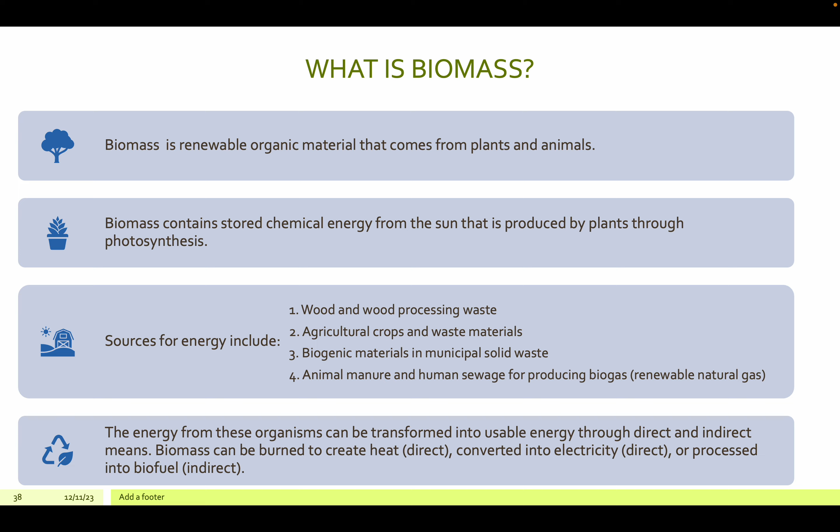So for biomass energy definition - biomass serves as the primary raw material for the production of biomass energy, or in short, bioenergy. Biomass energy refers to the energy produced from organic matter, such as plants, agricultural crops, wood, etc. Bioenergy is a renewable energy source that can be converted into heat, electricity, and biofuels.

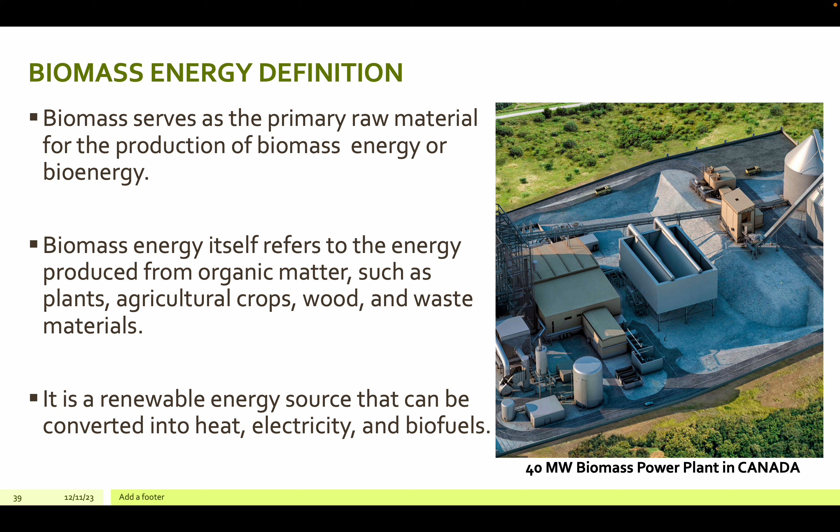On the right side is an example of a biomass power plant located in Canada. Its capacity is 40 megawatts.

History of biomass energy: in 1840, there was the first commercially used biomass gasifier, built in France. In 1880, Henry Ford used ethanol to fuel one of his first automobiles, which was called the quadricycle.

In 1910, coal began to replace the use of wood in city homes. In 1950, electricity and natural gas displaced wood, used in most homes.

And in 1990, in the United States, the Clean Air Act controlled the sale of oxygenated fuels in areas with higher levels of carbon monoxide.

In 2014, industries increased biomass as a source of energy while following environmental laws in order to protect the atmosphere. As you can see, technology has made biopower more efficient over time because there are now machines capable of producing biomass into pellets that can be used as fuel.

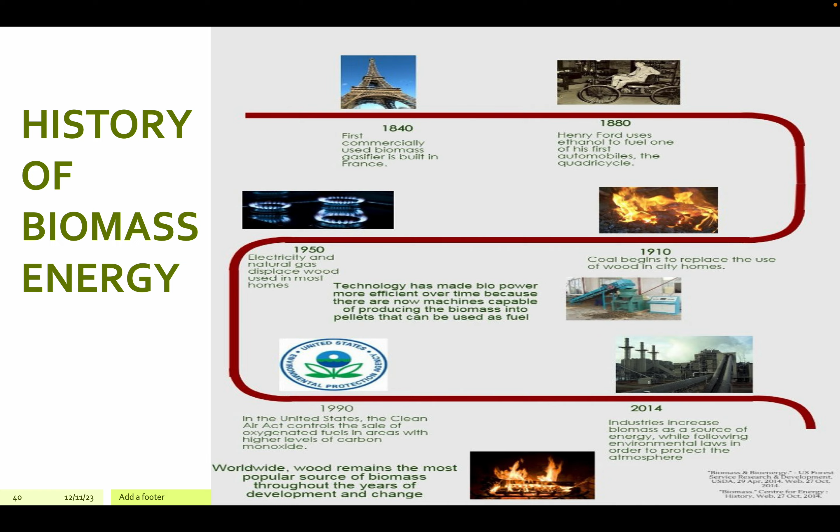So where does biomass come from? It can be obtained from plant, human, or animal-derived organic matter.

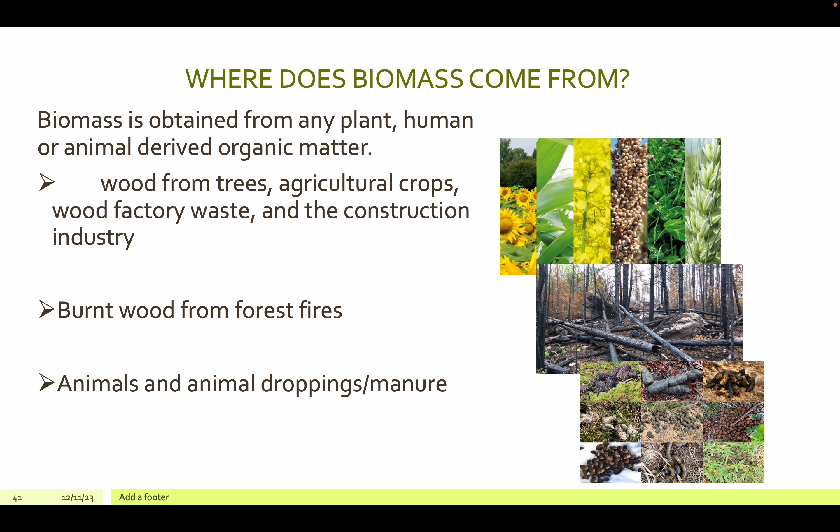How do we use biomass to generate electricity? There are many ways to generate electricity using biomass. One of them is combustion - a method of burning biomass to generate electricity. This is the most common method used.

Second is conversion to a gas or liquid fuel. Biomass can be converted to a gaseous or liquid fuel through gasification or pyrolysis method. Gasification is a process that exposes solid biomass material to high temperatures with very little oxygen.

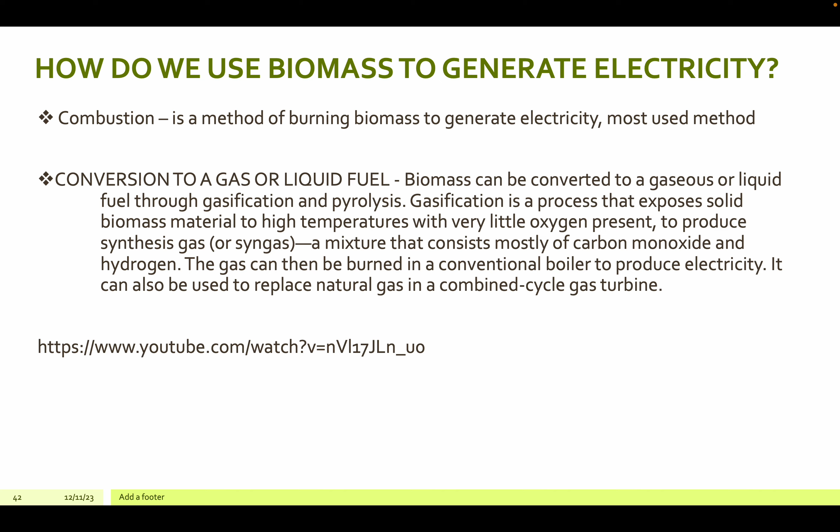The byproduct of this is synthesis gas or syngas. This is a mixture that consists mostly of carbon monoxide and hydrogen. This gas can be used and burned in a conventional boiler to produce electricity, or it can be used to replace natural gas in a combined cycle gas turbine.

Through thermochemical conversion process, we can generate electricity. As mentioned earlier, we can generate electricity using biomass through processes such as pyrolysis, gasification, and combustion. As you can see, biomass has many uses.

Using the pyrolysis method or process, we can produce charcoal, liquid oil, and fuel gas. These have different uses and byproducts.

The charcoal can be used for barbecue, and also used in the metallurgical industry. Its byproduct, liquid oil, can be used in our cars and engines, and in return can generate electricity. It can also produce fuel gas, which can also be used in engines to produce electricity.

In the gasification process, it can produce fuel gas which will be used in engines and can also produce electricity, and gas turbines which will generate electricity as well. And then our third process, which is combustion or direct burning, can also generate electricity through direct burning.

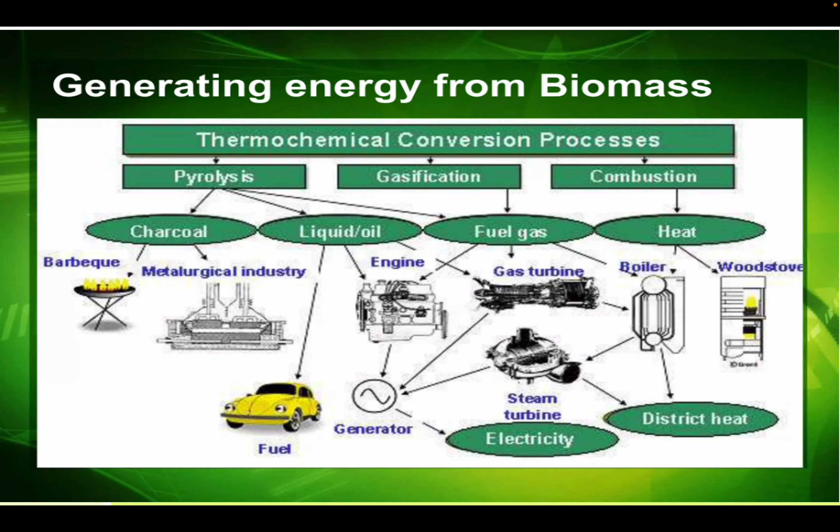Through the boiler, it will generate electricity. So, pyrolysis - these three processes will be elaborated further in our next slides.

So, pyrolysis. Using pyrolysis, waste to energy technology applications for municipal waste treatment in the urban environment is used. The pyrolysis process begins when municipal solid waste undergoes pre-sorting and shredding.

So, our municipal waste undergoes pre-processing as we can see in our flow chart. The dry biomass materials are sorted from the recyclable materials and inorganic materials. What we use for pyrolysis are the organic materials, so the non-organic materials are sorted out or separated.

And then, it is metered into a reactor. After the non-organic materials are sorted or separated, the organic materials will be metered into the reactor with little or no oxygen. The temperature in the reactor is increased to a range between 1,200 and 2,200 degrees Fahrenheit. So, as you can see, after sorting and shredding, it does go directly into our pyrolysis reactor, which reaches 1,200 to 2,200 degrees Fahrenheit.

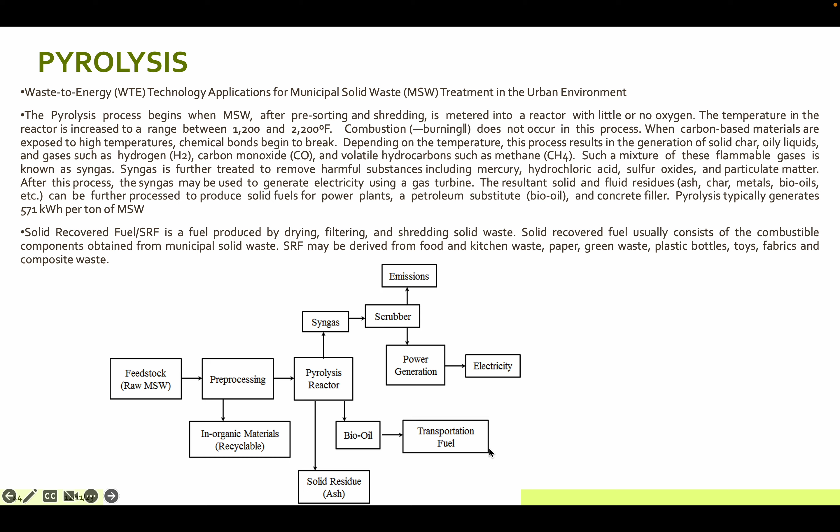This bio-oil is used as our transportation fuel. So, the next process is gasification.

Similar to pyrolysis, conventional gasification often begins after removing recyclables and large items. Just like with pyrolysis, recyclables are segregated since we still use the organic matter.

So, the remaining municipal solid waste is fed into the gasifier. After it is segregated, those materials are dried, then they go into our gasifier. The gasification reactor is heated to a temperature between 1,450 to 3,000 degrees Fahrenheit.

Gasification uses a sub-stoichiometric volume of oxygen, often called a starved air process. This creates a smoldering reaction which generates syngas, a byproduct mixed with combustion products such as carbon dioxide and water vapor.

Often, steam is added into the process in order to enhance production of hydrogen and hydrocarbon gases. The syngas byproduct is cleaned up to remove hazardous components and can then be used to generate electricity.

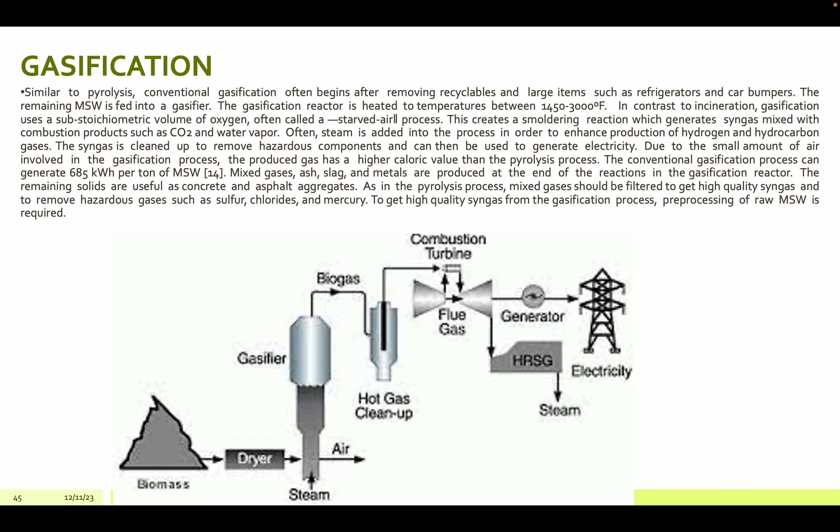The remaining solids are useful as concrete and asphalt aggregates. As in the pyrolysis process, mixed gases should be filtered to get high-quality syngas and to remove hazardous gases such as sulfur, chlorides, and mercury. To get high-quality syngas from the gasification process, pre-processing of raw municipal solid waste is required.

The steam creates pressure in the boiler, and the force of the steam rotates the turbine. The turbine then moves a wire coil in the generator, and the generator converts mechanical energy into electrical energy.

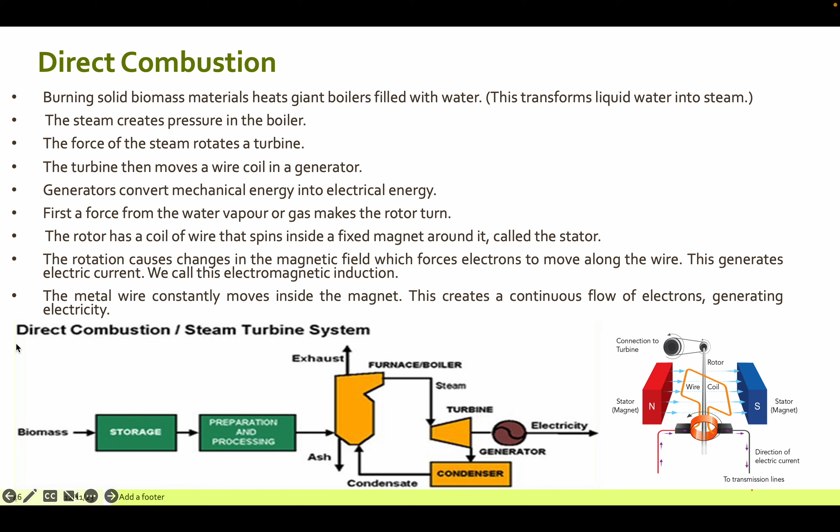This is the direct combustion or steam turbine system, along with its illustration. Next, aside from those three, another method is the thermochemical conversion.

Aside from that, we can also generate electricity using a chemical process. One example of this chemical process for generating electricity is called anaerobic digestion.

Organic waste including plants, food waste, and manure is fed into a sealed tank called the anaerobic digester. This is generally the process for anaerobic digestion, where it can be broken down by bacteria in an environment with no oxygen. Since there is no oxygen in the anaerobic digester, the bacteria produce methane amongst other gases, which gets pumped off as biogas.

The steam creates pressure in the boiler. So the byproduct after the anaerobic digester process produces biogas. This biogas in return produces biomethane, which can be made into certain fuel. The biogas is also used for generation of electricity, and it can also produce heat.

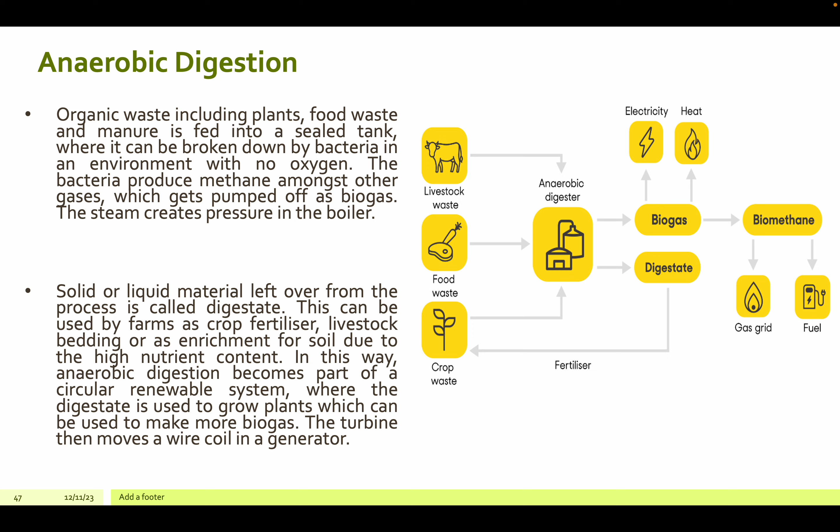The turbine then moves a wire coil in a generator.

So how can we use biomass to produce fuel? These are the variety of uses for biomass. One of these is the production of fuel. The products or fuels that can be made from biomass are alcohol, biogas, syngas, gasoline, and diesel fuel.

As we all know, alcohol can be found in alcoholic drinks such as beer, brandy, and whiskey. While biogas or methane is used for cooking, domestic fuel in lamps, lighting, and others. Syngas can be converted to liquid fuels, used for hydrogen production, and can be burned to turn turbines and generate electricity.

To elaborate, using the fuel or byproduct from biomass, which is syngas, we generate electricity. Lastly, gasoline and diesel fuel are synthetic fuels which may substitute for petroleum.

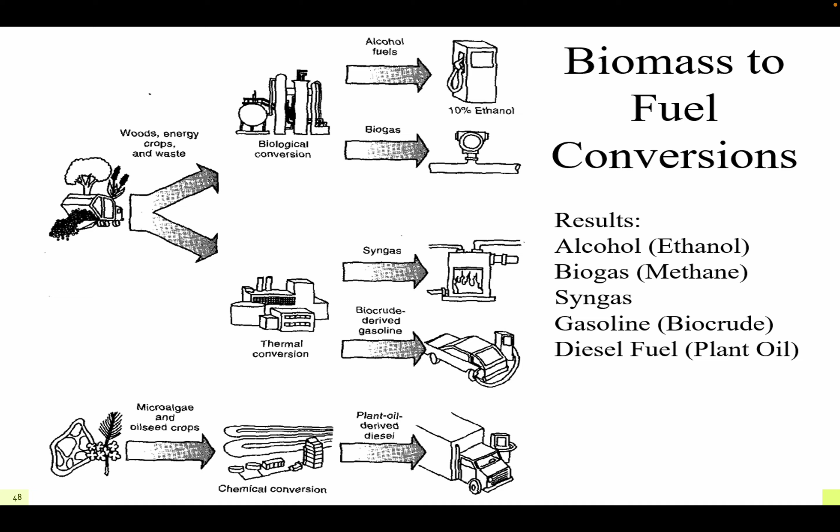What are the advantages of biomass energy? First, biomass energy is renewable in nature. It is considered renewable because the organic matter used for its production can be replenished through proper management and cultivation practices. The second advantage is its carbon neutrality. Although it releases carbon dioxide, the emissions are considered neutral as they are offset by the CO2 absorbed during the growth of new biomass, making biomass energy a carbon neutral option.

Third is the waste management benefits. Since biomass power plants generally utilize agricultural residues, forestry waste, and organic waste materials, this reduces the amount of waste in our landfills. It helps mitigate waste management issues and promotes a circular economy.

The fourth advantage is the potential for rural development. Biomass energy production can create job opportunities and stimulate economic growth in rural areas. If you build a biomass power plant, you can support local communities because the manpower you hire comes from those local communities.

And we can also help reduce the dependence on imported fossil fuels. Another advantage of biomass energy is its availability worldwide. Basically, biomass can be found anywhere.

Biomass energy is also relatively inexpensive, especially if we use municipal waste. You reduce waste around you while reducing cost on energy consumption. Next advantage is the reduction in carbon dioxide emission. By reducing carbon dioxide, we can also help our nature. Lastly, it can reduce dependence on foreign oil. Through biomass, we can produce alternative oil for our vehicles and generate electricity at the same time. So in short, it is a win-win solution.

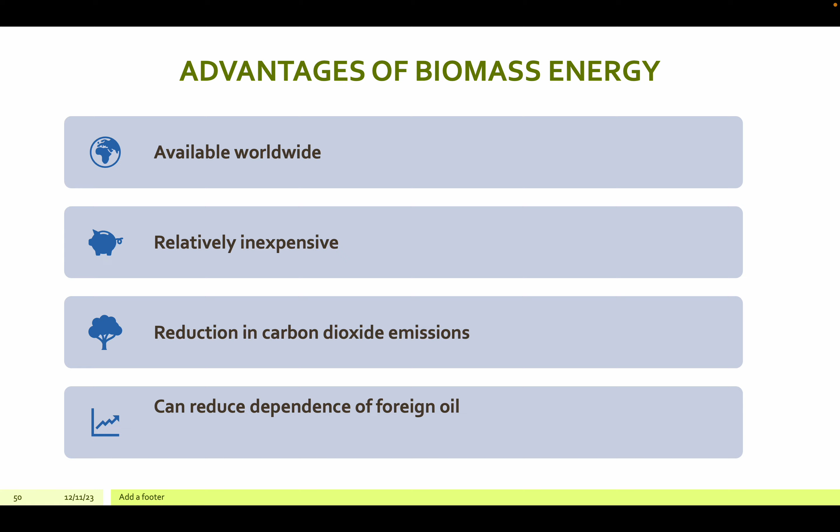So what are the disadvantages of biomass energy? First, it cannot provide enough energy to supply large demands. If it's a large demand you need to supply, you need bulk or huge amounts of waste. In our case, our waste is not that much to suffice the cities that need to be supplied with power.

Second, it could increase deforestation and loss of biodiversity in less developed countries. If biomass resources are not replenished as quickly as they are used, they can become non-renewable.

Third disadvantage is that it is not currently developed enough to rely on as a steady energy source. The government is not focusing on developing new technology for biomass power plants, so it's not that reliable of an energy source.

Next disadvantage is the large land requirement. Biomass energy plants are found in urban areas where there is limited space. These plants need a lot of space for storage of raw materials or biomass. If we want to build biomass power plants, we need large areas because the biomass raw materials needed are abundant, so the area required is also large. And it should be in urban areas because that's where there's a lot of waste or biomass raw materials.

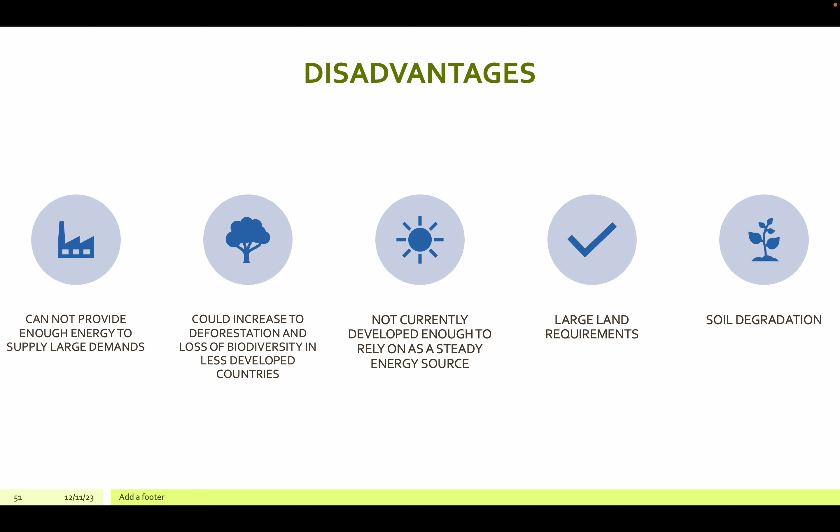And then lastly is soil degradation. Due to overusing fertilizer and pesticides to increase growing crops for the purpose of bioenergy resources, this will cause soil degradation.

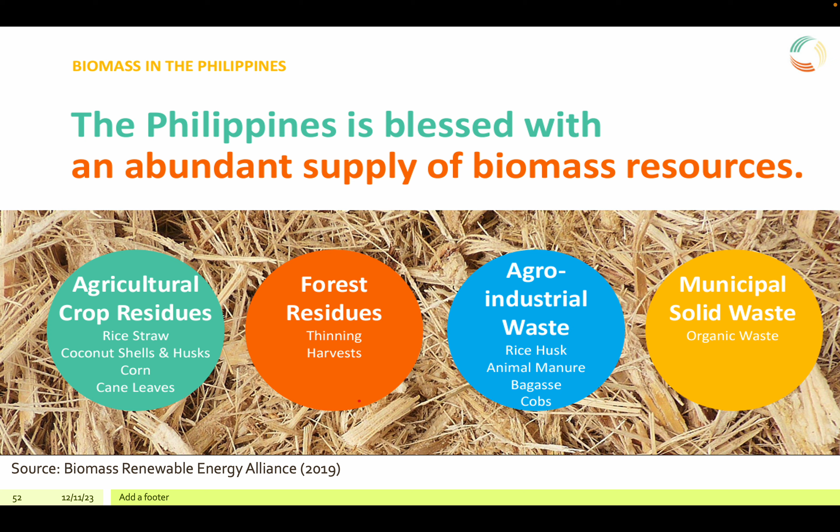So biomass in the Philippines. Actually, the Philippines is blessed with an abundant supply of biomass resources due to agricultural crop residues, for example rice straw, coconut shells and husk, corn, cane leaves. The Philippines is very rich in agricultural products, so we have a lot of residues which could be used in our biomass power plants. Also, there are forest residues, agri-industrial waste, municipal solid waste, or organic waste.

So as of 2019, the Philippines has a biomass supply of 356.1 megawatts current capacity, and 4,400 megawatts potential capacity.

This is segregated into Luzon, Visayas, and Mindanao as shown. As of 2019, the capacity in Luzon using biomass power is 156.81 megawatts out of the potential capacity of 2,095 megawatts. In Visayas, the existing biomass power capacity is 162.5 megawatts out of 1,500 megawatts potential capacity. And in Mindanao, the existing is 36.79 megawatts out of the potential capacity of 845 megawatts.

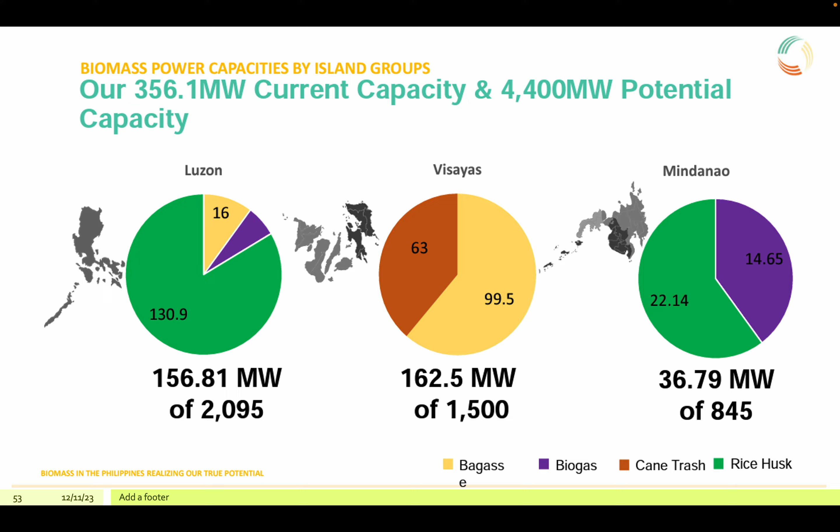As you can see, our utilized biomass power capacities don't even reach half of our potential capacity. So these are the existing biomass power plants in the Philippines.

There's a 12.5 megawatt Samal biomass power plant. It's located in Bataan. It is situated on a 6-hectare property. They use rice husk to generate electricity.

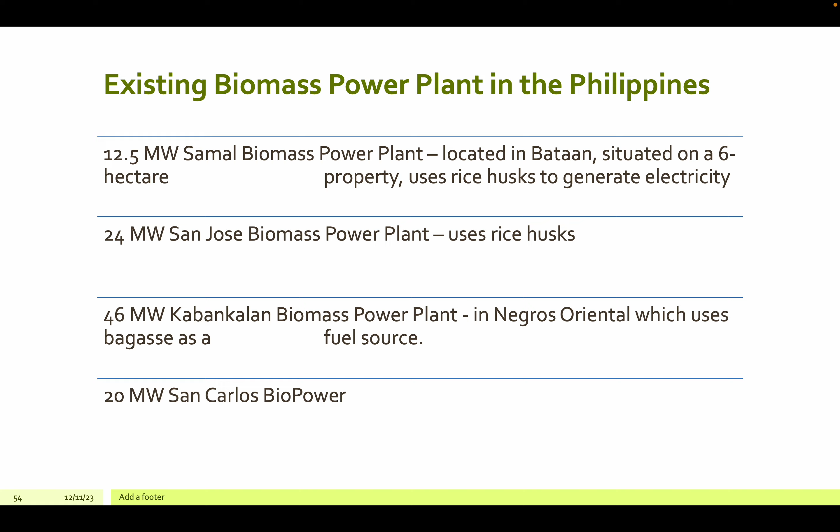Meanwhile, there's a 24 megawatt San Jose biomass power plant which also uses rice husk as raw material. In Negros Oriental, there's a 46 megawatt Kabankalan biomass power plant which uses bagasse as fuel source. And there's a 20 megawatt San Carlos biopower plant.

So, challenges and the way forward. These are some of the reasons why there is minimal biomass energy generation or biomass power plants in the Philippines. First is the lack of policy incentives. Second is the lack of regulatory frameworks. Third, lack of funding. And fourth, lack of technical expertise.

So to overcome these challenges, the government should do the following. First, the government should implement policies that will incentivize the development of biomass projects. Second, they should provide adequate funding and technical support to developers. And third, continued investment in research and development to improve biomass conversion technologies, optimize efficiency, and reduce cost.

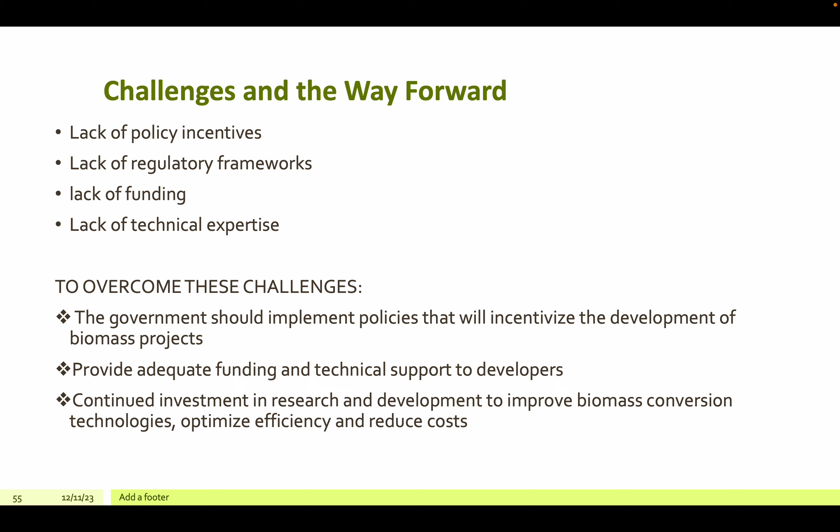So that's my report on wave and tidal energy and biomass energy. Thank you very much.